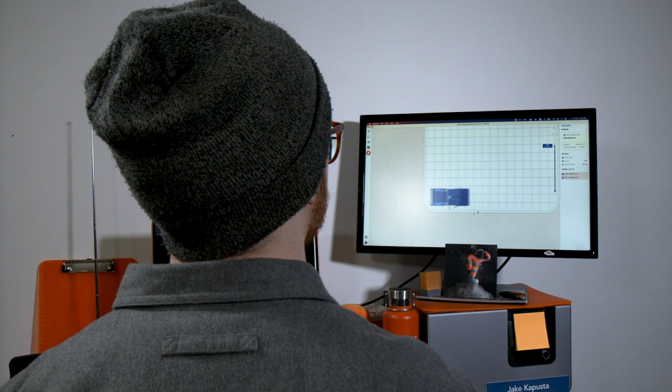Let's start with what the design looks like in our 3D print software, Preform. Preform is Formlabs' print preparation software for both our SLS and SLA 3D printers. We have a specialized view for the Fuse 1 build area that makes starting a print quick and easy. Here you can see the mixer clip design loaded into Preform.

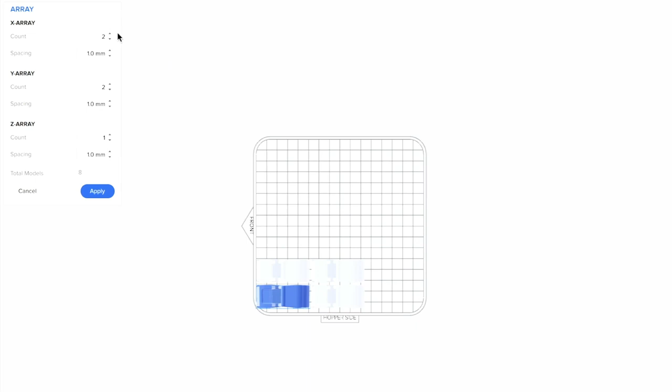First, I rotate the part in an optimal orientation for printing, and nest a copy of the same part alongside in the inverse orientation. Next, I use the Array tool to duplicate these parts in a grid, and then duplicate that grid vertically along the Z-axis. This allows me to densely pack the build volume and print as many parts as possible in one job. In this case, I can print 102 mixer clips at once, which you can see in the model list here.

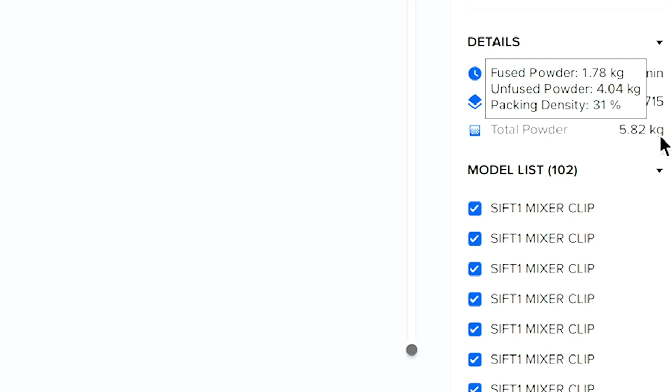In the detail menus above, I've calculated the print time, which should take about 52 hours from start to finish. I can also see the total amount of nylon powder for the job, and if I hover my mouse over this figure, I'll see a more granular view of the materials cost for the individual part. From here, I'll use my print menu to select the printer by name and send the print job to the Fuse 1 via my local network connection.

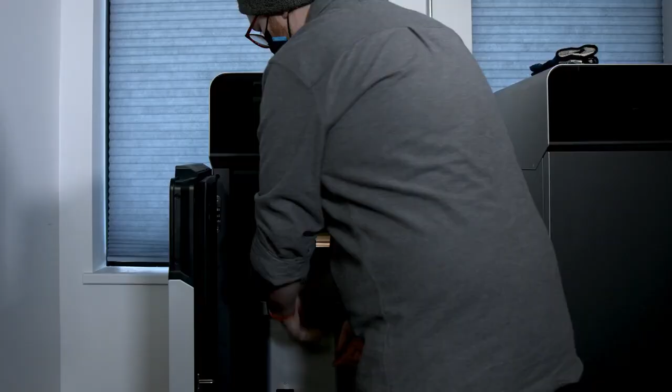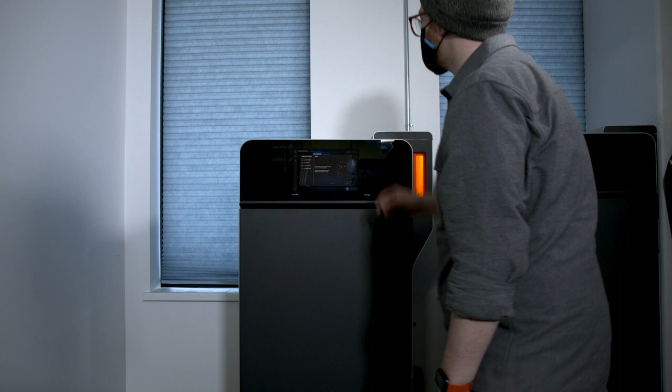Once I've loaded the print onto the Fuse 1, I select the job via the touch interface and start the print. The user interface runs through a series of quick pre-print maintenance checks to help ensure print success. After confirming print readiness, the Fuse 1 heats up to 180 degrees Celsius and coats the build area with a thin layer of nylon 12 powder.

Our print process uses a laser to sinter layers of nylon 12 powder together to create exceptionally strong and functional parts. The non-sintered powder suspends the printed parts in place as they fuse, eliminating the need for printed support structures. After the print job is completed, the Fuse 1 will let you know when the build chamber is cool enough to handle and remove. Industry-leading cooldown times allow for non-stop printer uptime, as you can swap in an additional build chamber shortly after removing the chamber containing the previous print.

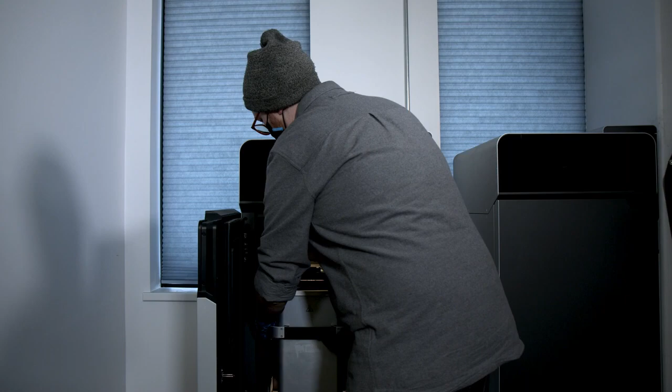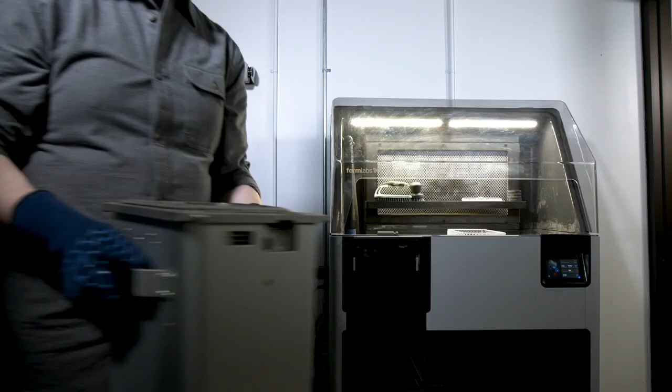In this case, the Fuse 1 allows us to print on a production schedule to complete this job 3 times a week, yielding 300 consumer-ready nylon parts in a single printer. I'll remove the build chamber and transfer it to the Fuse Sift. This all-in-one post-processing station combines part extraction, powder recovery, storage, and mixing within a compact footprint.

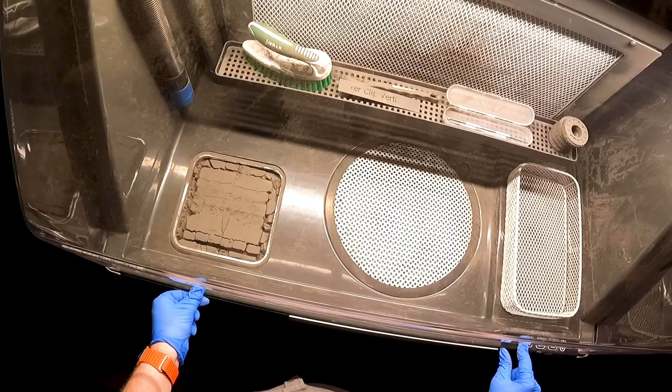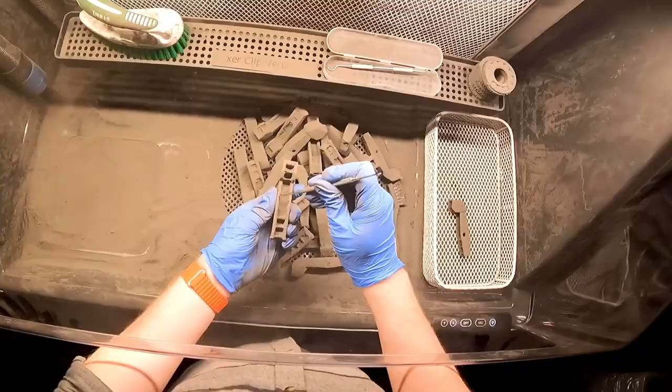Here you can watch as I unpack the build chamber and excavate the parts. The entire print rises up out of the build chamber into the Fuse Sift work area, where I can then use the included cleaning tools to remove excess powder. The integrated vacuum and air filtration system ensures that loose powder is contained in the work area, keeping the post-processing experience both clean and tidy.

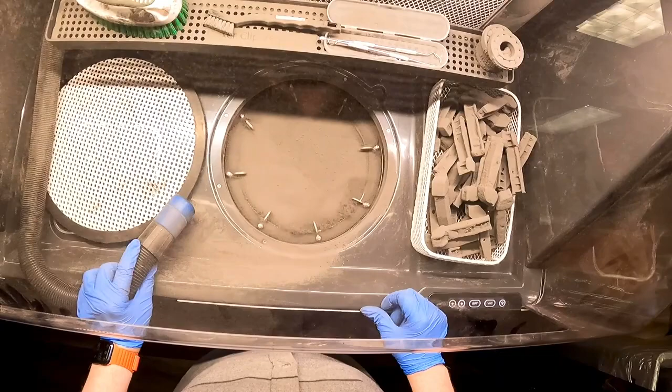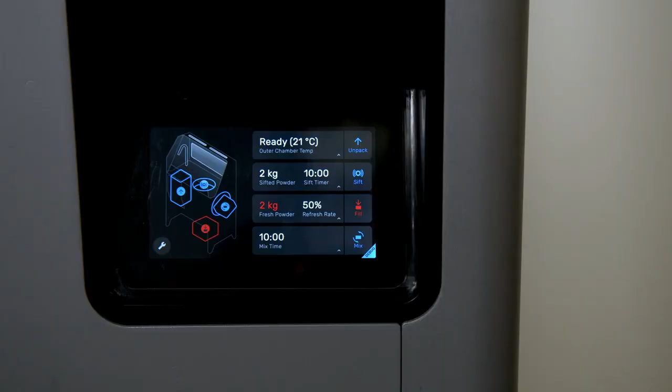Once we've excavated our parts, the excess nylon powder drains through the Sift filter to catch any environmental contaminants that may have been introduced during the unpacking process. The sifted powder then enters a storage hopper alongside a separate hopper of fresh nylon 12 powder. When you're ready to start your next print, you can select a mix ratio for the reclaimed and new powders, which then automatically dispense into the powder cartridge below.

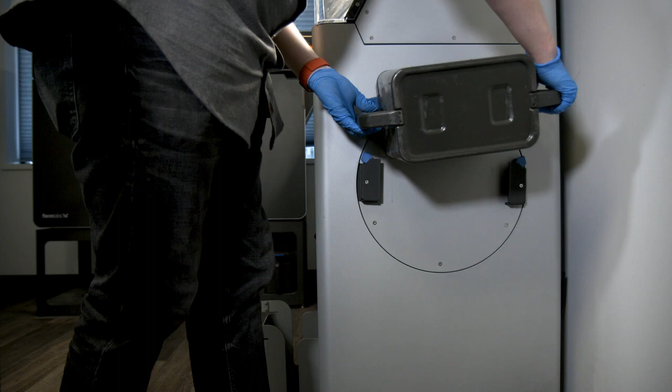The powder cartridge clips onto the integrated mixer on the side of the Fuse Sift and rotates to ensure the two powders are combined uniformly. Fun fact, this blue component seen here is the mixer clip that we're printing today.

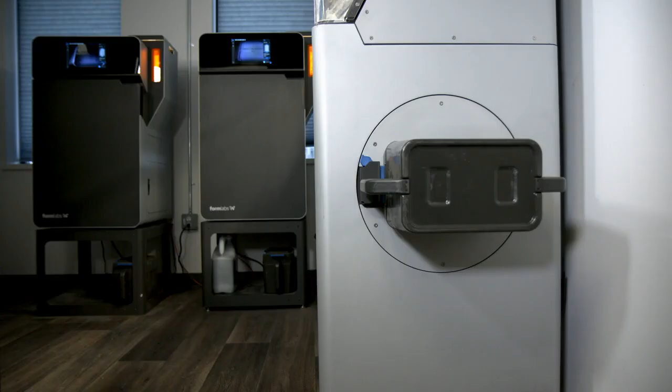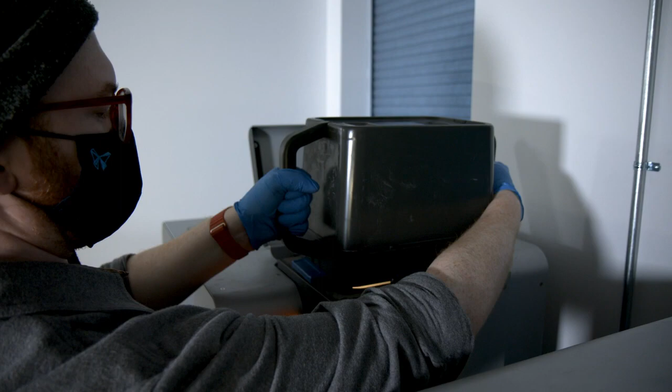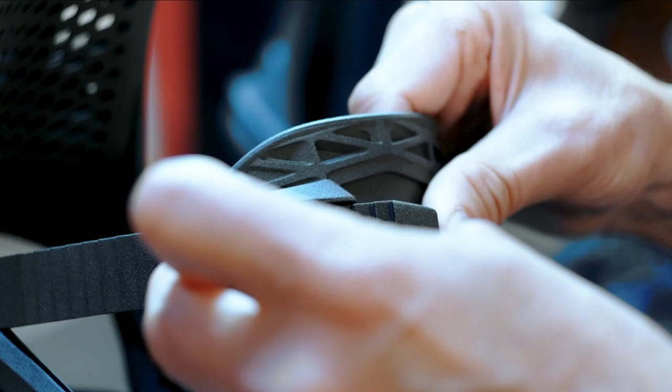Thanks to the innovative Fuse 1 print process, we are able to print with recycled powder at a 30% refresh rate. This means that in order to start a print, you need to use only 30% new nylon 12 powder, and 70% can be reclaimed from previous prints using the Fuse Sift. This allows you to consistently produce high-quality parts using reclaimed material, cutting down on material waste and consumables costs. During our extensive internal and external user testing, no degradation of mechanical properties was seen in parts printed with reclaimed powder, even after dozens of print cycles.

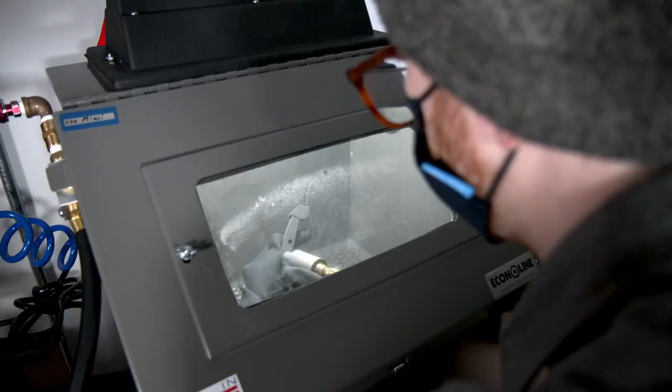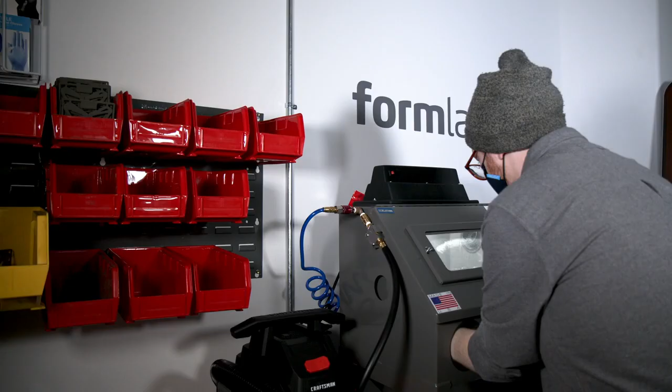The last piece of post-processing involves using a media blaster. This is an optional post-processing tool that is not included in the Formlabs workflow directly, but is a recommended tool for achieving a premium surface finish. A jet of air and fine glass beads helps to remove excess nylon powder from the surface of the printed part. Finally, a burst of compressed air should be used to remove any stray blasting media that may have been left behind. If using a media blaster, be sure to keep it separated from your Fuse Sift workstation, as blasting media can negatively impact the print quality of your nylon powder.

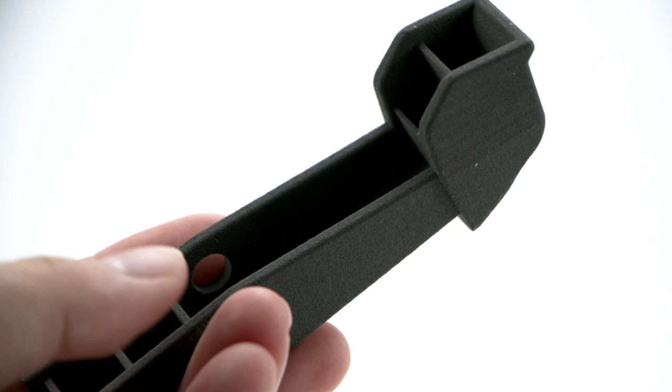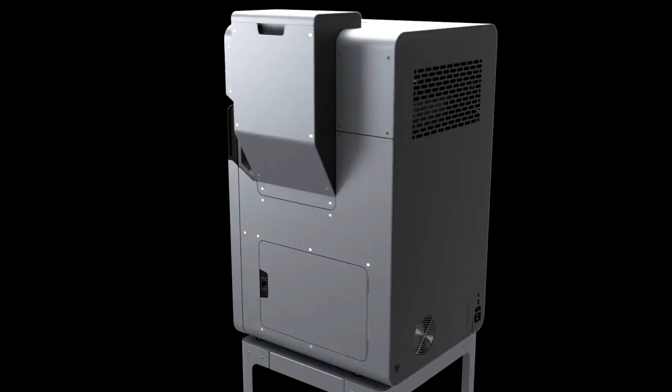So here we have a finished mixer clip ready for use. Formlabs engineers leverage SLS 3D printing in order to quickly iterate on the design of this component before committing to the final part for production. This saved both time and expensive tooling costs for the injection molded part that you see on the Fuse Sift today. In addition to prototyping, we use the Fuse 1 to manufacture components that are installed in the printers that we ship to customers, such as the IR sensor cone seen here.